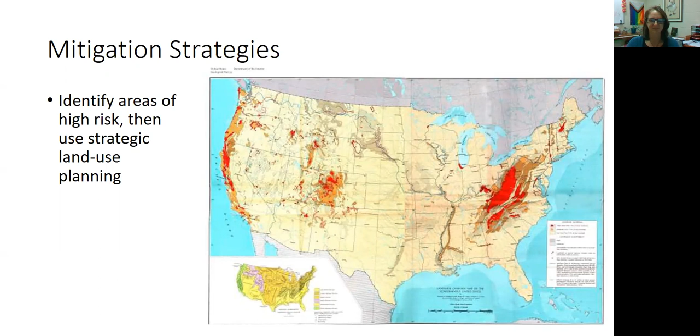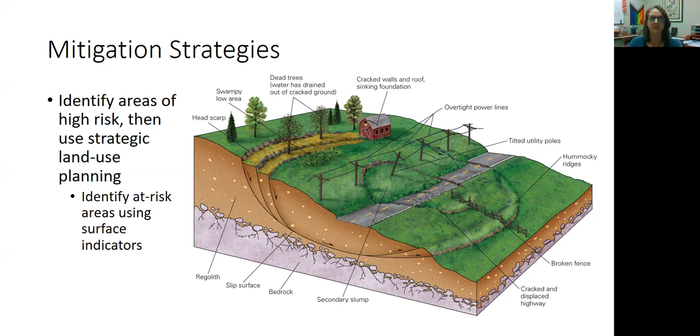Now, if we do have to build somewhere, right? Say we have to build a road along a mountain, right? Sometimes that just has to be done. There are ways to mitigate the risk of mass wasting. So we talked about how high water content, a lot of rain can cause a mass wasting event, can cause a landslide. Well, there are ways to allow that water to escape off the mountain without causing the material of the mountain to become lubricated and wet.

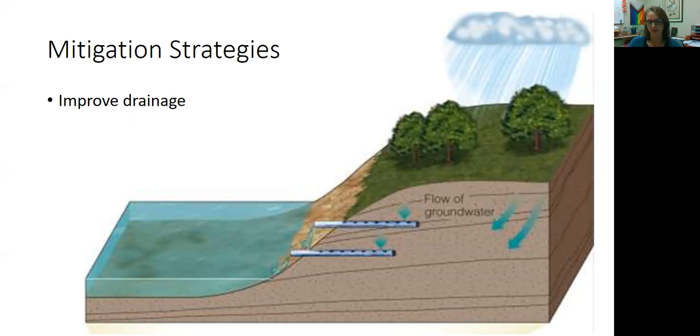So one way we do this is by putting in place drainage pipes, right? That will catch the water when it flows underground and move that water away from the mountain so it flows off the mountain quickly. Okay? So if you've ever been driving along the road and you see pipes sticking out of the mountain, right? And you wonder to yourself, what in the world are those? Well, those pipes are there so that water can flow off the mountain and not cause a landslide.

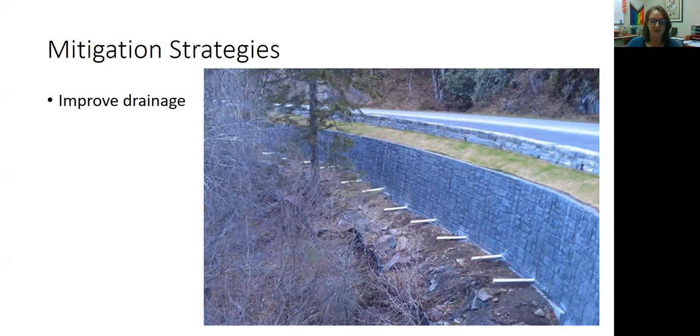I know people who think the water coming out of these pipes is like fresh and clean. It's not. Please don't drink it. Not a good idea.

Another way we can mitigate mass wasting risk is by planting vegetation, right? Vegetation is nature's anchor. Those roots that grow underground hold the material in place. They prevent slumps. They prevent mass wasting, right? So planting more trees will prevent more landslides, more slumps along our mountains.

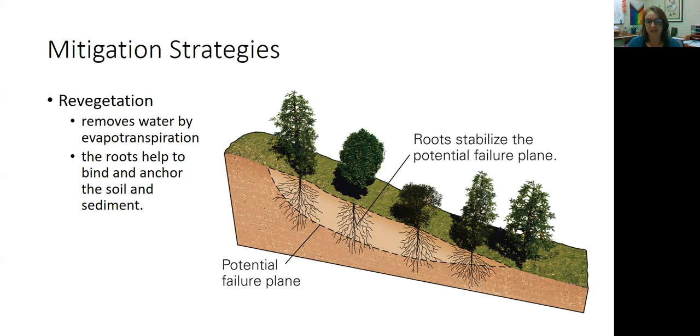We can also terrace, right? And this is where rather than having a single fairly steep angle, we create more like stair steps. This is really, really common when people try to have agricultural fields in the mountains, right? Where they want to plow, but they don't want to have their soil, their vegetation, fall off the side of their hill. They might terrace, right? And that can prevent mass wasting.

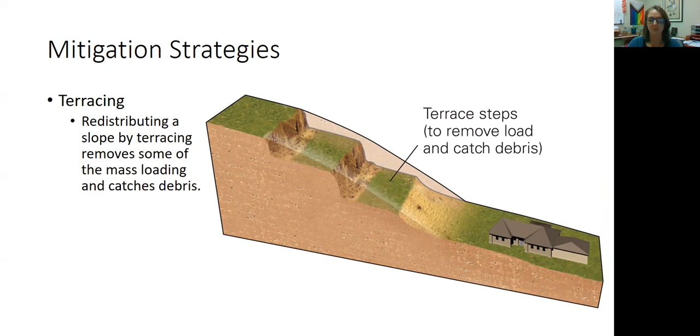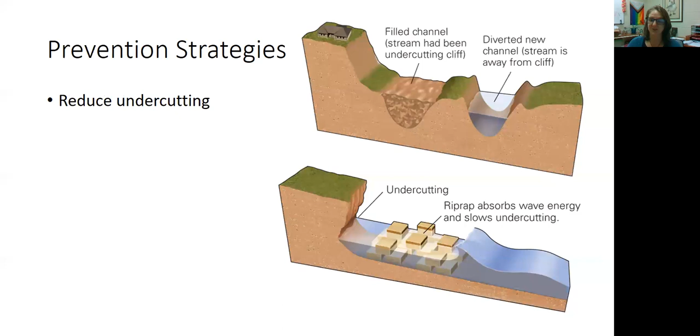Finally, we can reduce undercutting, right? We know that if we have to build a road on a mountain, we might have to create a steep slope. Well, we can do that in a way that doesn't undercut, right? We can divert streams to prevent undercutting. We can put riprap, and that's just like material. It could be boulders, it could be trees, it could be anything we can find at the base of a hill so it's not undercutting.

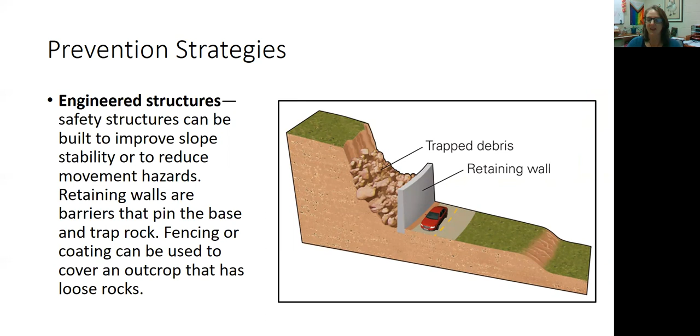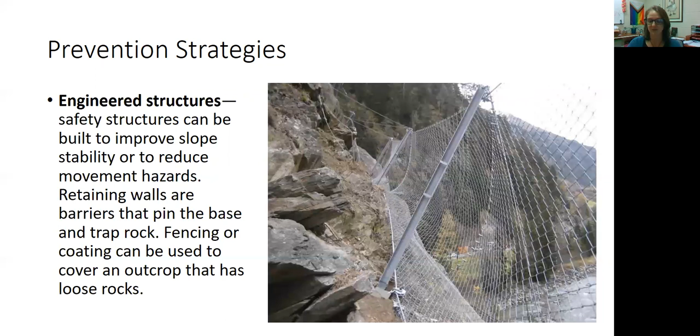And we can also engineer structures that just admit that mass wasting events are going to happen, right? We are going to have rock slides. We are going to have landslides, but we can put structures in place to protect what we need to protect. Like we can put a retaining wall between a road and a cliff to trap any of the debris that falls down. Right? We can put fences. You might have been driving along the road and seen fences between the road and the mountain. That's protecting your car, protecting the road from rocks that fall off the mountain.

If you've ever been on a mountain where snow was really common, you might have driven through avalanche sheds, right? It's kind of like tunnels that prevent snow from piling up on your car. Or if you've driven through the mountains, you might have seen these bolts that have been driven into the side of a mountain. Those are bolts trying to keep the rocks on the side of a mountain, right? So they won't fall off. So all of these are engineering strategies we can use to work with the natural processes of mountain building and mass wasting.